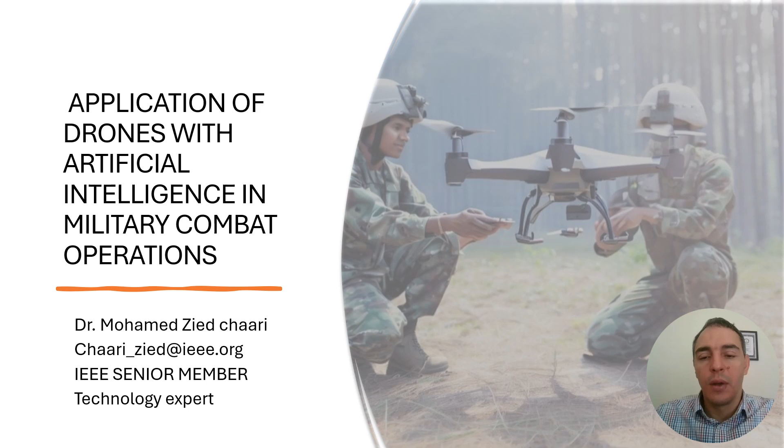We are working very hard in drones. So the outline of this presentation: we can start with the development status of the drone industry, the UAV classification, then we'll talk about the legitimacy of use of drones, and the legal use of drones. Fifth, we'll talk about what AI is and how it works in drones for both military and civilian applications. After that, we'll talk about the application of drones with artificial intelligence in military combat operations, and finally conclusions.

So we'll start with the development status of drones and history. According to this chart produced by Statista, in 2016 the revenue in billion dollars is around $0.6 billion, but in 2025 it will be around 12.6. In 2023 it's around 7.6. So we can see the huge increase in drone revenues from 2016 to 2025. And we can see the drones sold in thousands from 2016 is 110,000 to 116, until 2,679,000 drones worldwide, meaning huge utilization of drones worldwide.

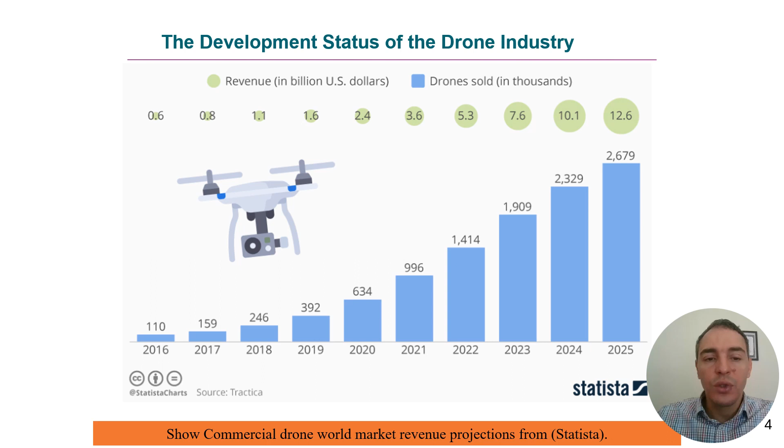We have another chart presenting the market size and forecast between 2018 and 2024, and we can see the CAGR increase is around 20.5%. From 2018, around 14 billion United States dollars, jumping to 43 billion USD in 2024.

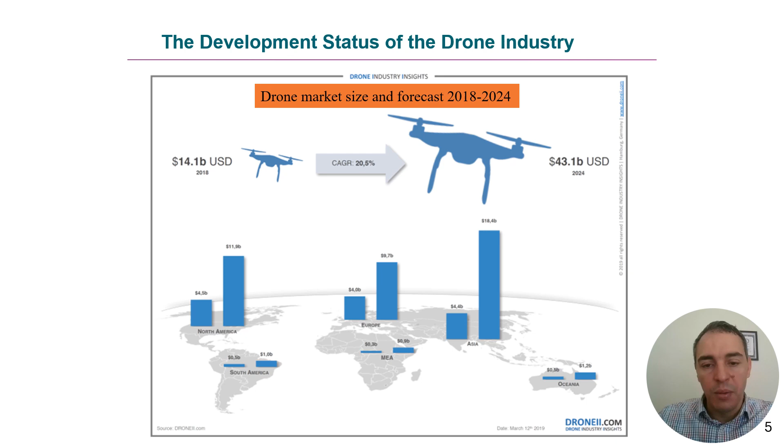The chart gives us more details according to area. You can see here North America, the value jumped from 4 billion to 11 billion dollars in 2024, and you can see the big market size in 2024 in Asia. In Asia we're talking about China, because it has a lot of companies like DJI, a huge worldwide manufacturer of drones. We can see Oceania or Australia has around 1.2 billion, and Africa is still 0.9. So this gives us more details.

Also for top dual-use drone manufacturers, we can see the United States has a big, high ranking worldwide. We can see here many companies making drones like 3D Robotics, SenseFly, DJI.

But now this question raises a big issue. CNBC asked people: can the United States compete with Chinese drones? Now many people, in many fighting areas, many combat areas, are now utilizing DJI and civilian drones. So how can we now change this mindset?

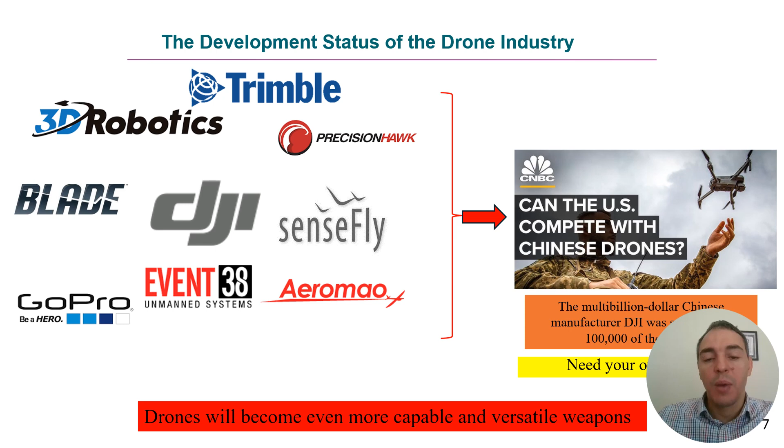Drones will become even more capable and versatile weapons. So drones are like weapons now - it's very dangerous, we need to take care about it. The use of drones in military warfare is likely to continue growing in the years to come, as drone technology increases very fast. Drones can be used in surveillance and reconnaissance, and can be utilized to attack enemy targets. Drones also have the capability to provide more effective surveillance, and now new types of military operations are made possible by drones. We can use drones for cyber attacks, for long range survey, and for many other operations.

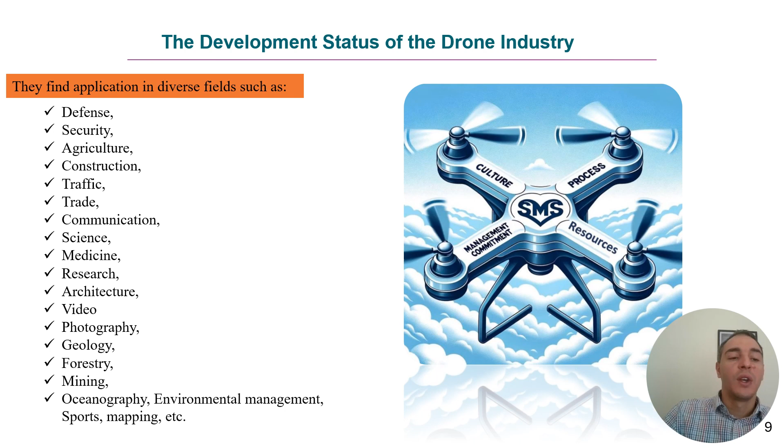But before talking about this issue, drones can be used in many fields: defense, security, agriculture, construction, traffic, communication, science, medicine, research and development, architecture, video, photography, geology, and a lot of applications.

After that, since there are a lot of drone sizes and a lot of drone technology, we should now talk about UAV classifications.

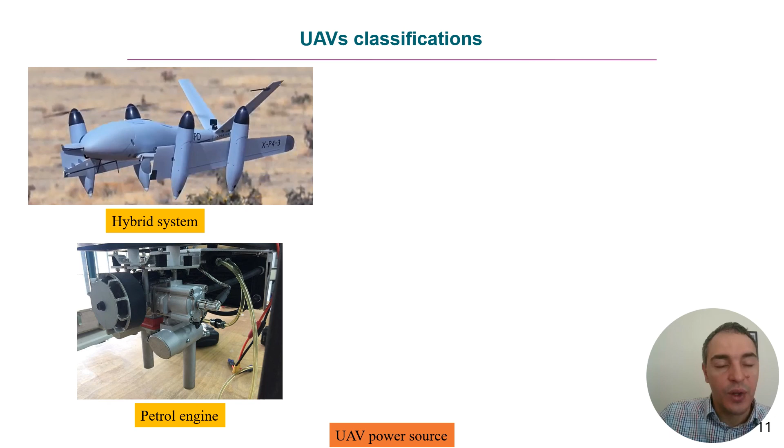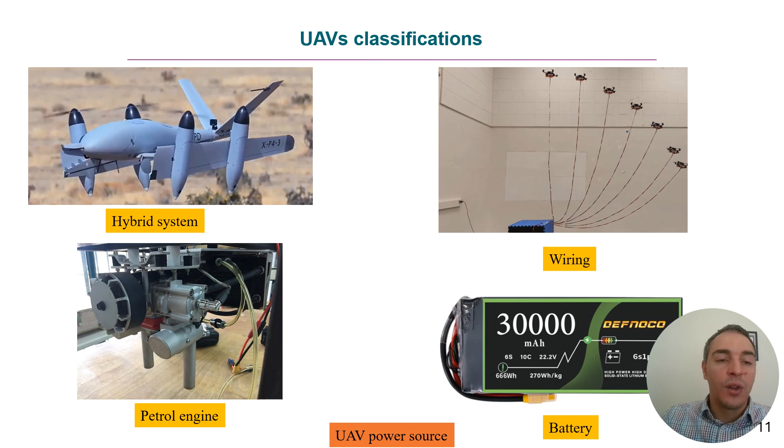In UAV classification, the most important parameter is the power source, the UAV power source. Now we have hybrid systems. You have petrol engine drones, battery drones, and wired drones. So we can use only wired drones, just wiring to make operations - no need for battery, no need for petrol engines. You can use a normal battery for operation like DJI, you have batteries, or we can use a petrol engine like Shahed, the Iranian drones, or any military drones. Also, we can use a hybrid system, meaning drones equipped with or utilizing both mechanical engines and batteries.

So there's a lot of civilian areas. We can use this drone for civilian areas, for example inspection, oil and gas, marine application, meteorology, agriculture, gas, and oil and gas inspection field.

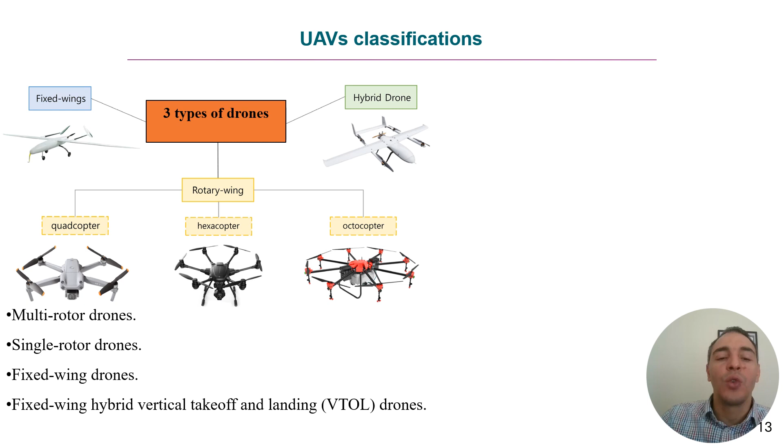So there are 3 types of drones: hybrid drones, fixed wing, and rotary wing drones. Rotary wing drones include quadcopter, hexacopter, and octocopters. So multi rotary drones, single rotary drones, fixed wing drones, fixed wing hybrid vertical takeoff and landing (VTOL) drones, and tank copters. We can see in this video, a drone can be like a tank, and also can fly. We can see this video now please.

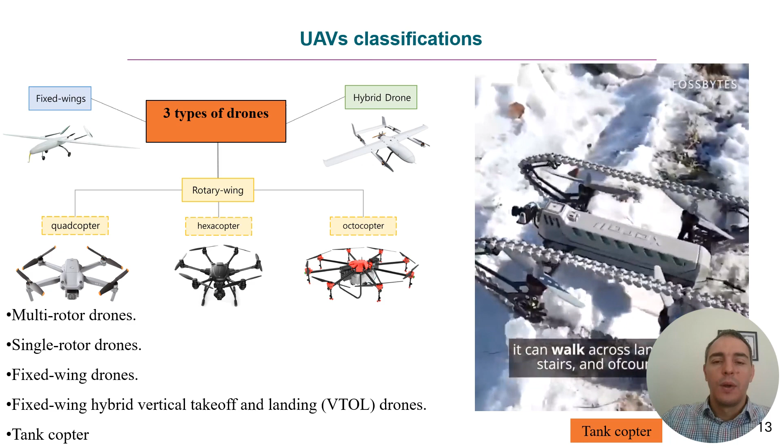Who said drones are meant just for the skies? Meet Xerall's X-Tank Copter, a drone that defies norms, conquering both air and land. With the agility of a tank and the grace of a copter, it can walk across land, snow, stairs, and of course fly. Weighing just 550 grams, this compact and nimble drone can be controlled easily via smartphone. Besides, it boasts a 720p HD camera, captures aerial shots and videos with a 120° wide-angle view.

Should all drones have such air and land travel features? Share your thoughts.

So we can see these drones can be utilized for land operation, and can be used like fly drones.

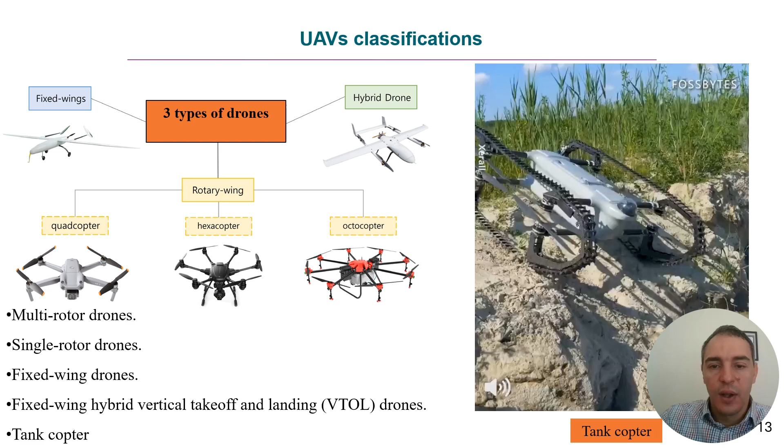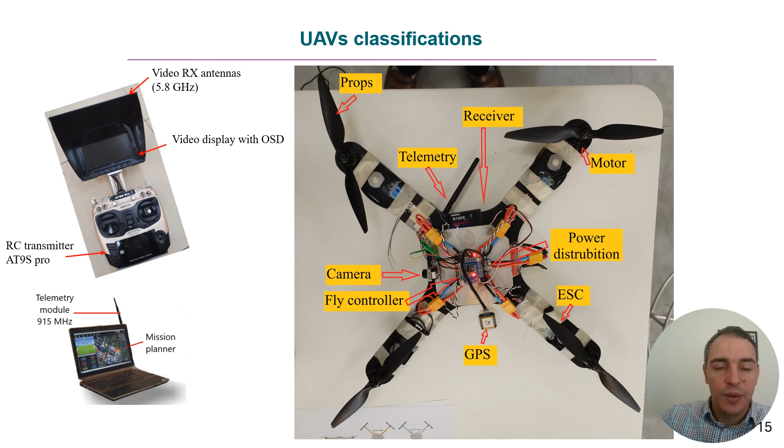The most important components of drones - there are also a lot of sensors. Any drone can utilize LiDAR, image sensor, magnetometer sensor, thermal sensor, multispectral sensors. For communication, we can use GPS, flight controller, radio telemetry, FPV goggles, and remote control. And for the main components of a drone, as we said in slide number 15: motor, battery, propellers, and ESC controllers.

This philosophy, the philosophy is here: how can people, or maybe people, utilize civilian application drones for illegal applications.

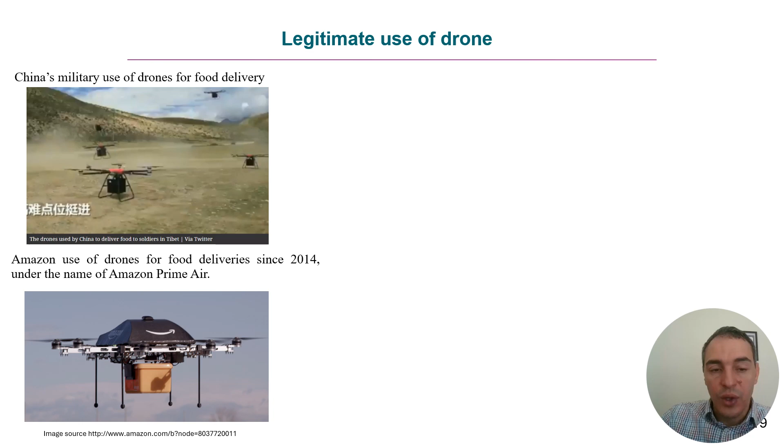So we go for legitimate use of drones. We can see Chinese military use the drone for food delivery, and Amazon trying to utilize drones for food delivery since 2014, so since 10 years ago.

Also, many UAVs now utilize for delivering first aid equipment in case of emergency, and this project is running by TU Delft University in Netherlands. Now the UN utilizes Drones for Good Corridor launched for food delivery or medicines, like the operation done in Sierra Leone.

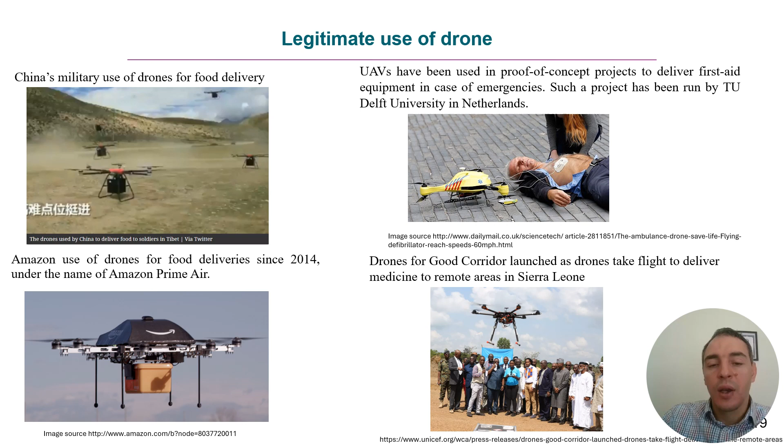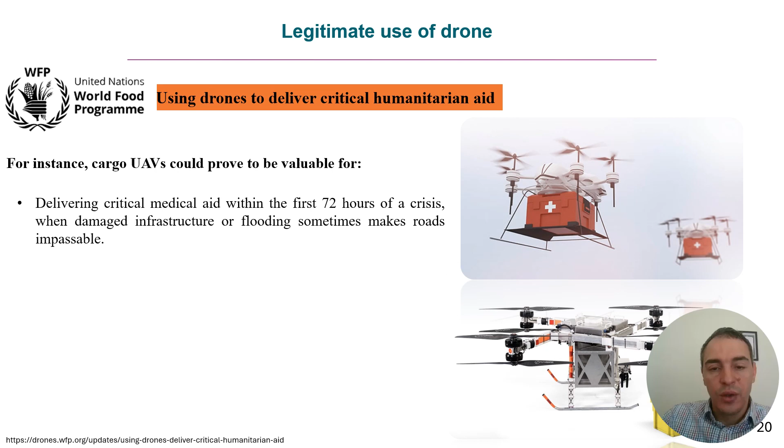Also the World Food Programme now is starting to utilize drones for food delivery in critical humanitarian aid. So delivery can be transferred from one place to another in short time, cheaper, and safer. No need for resources like a pilot, no need for landing strips and airports.

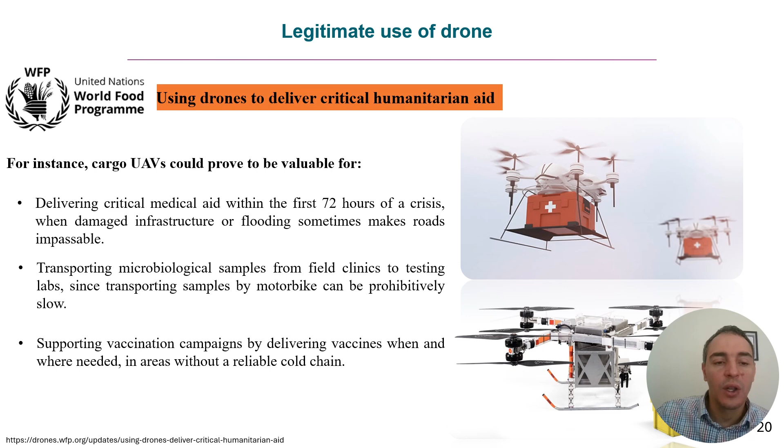So we just need a strong drone with the capability to carry 10 kg, 20 kg, for long distances of 10, 15, 5 kilometers, and this drone can be utilized in disaster applications. We can transport microbiological samples from field to testing labs, and also support vaccination transport from one area to another.

Also, drones can be utilized now for fireball dropping, and this was utilized in California in 2021. The firefighter teams use drones to drop fireballs, and also to survey the area and the progress of fire in the farm and in dangerous areas.

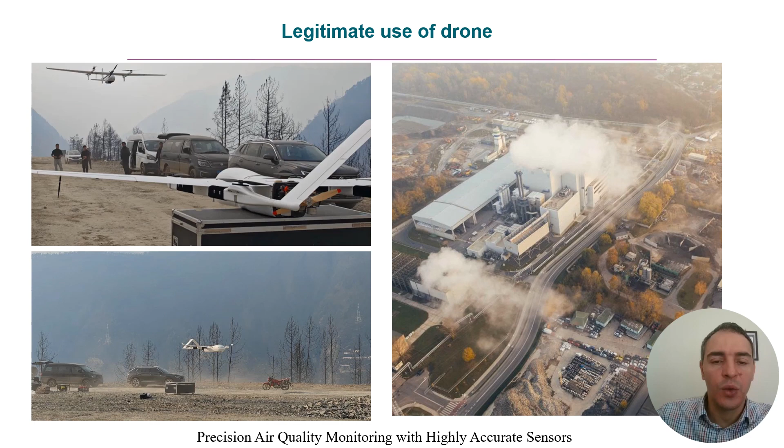Also, drones can be utilized to make measurement and quality monitoring of air and pollution. Drones can be equipped with a lot of sensors to give us more details about air quality.

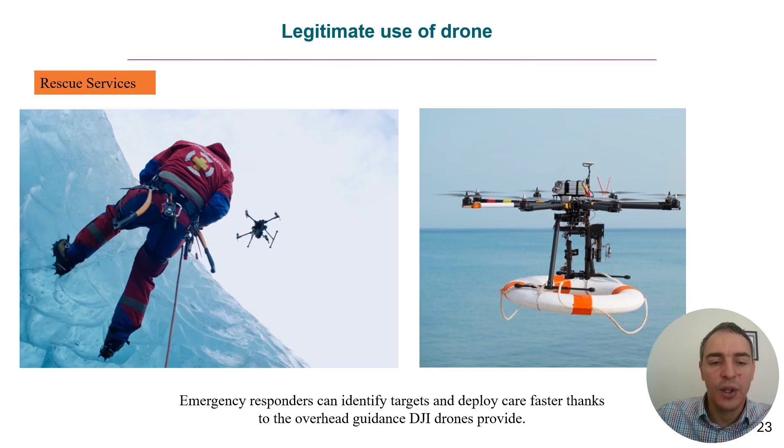Also, drones can be utilized for rescue services, and emergency response can identify targets faster than any other technology.

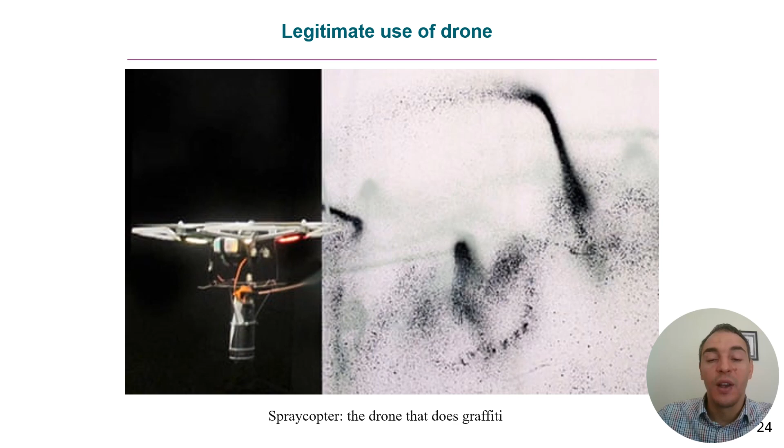Also, drones now can be used like spray copters, so you can utilize them if you need to write something or do graffiti in emergency times. So you can use spray copters.

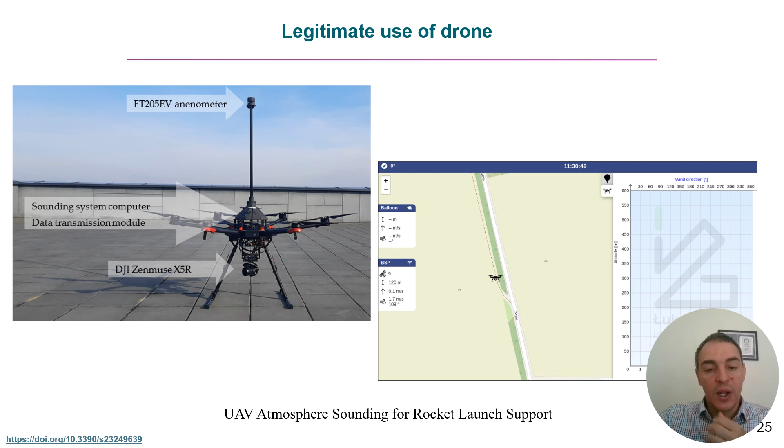Also now drones can be utilized like UAV atmosphere sounding for rocket launch support. So it can help for rocket launch support.

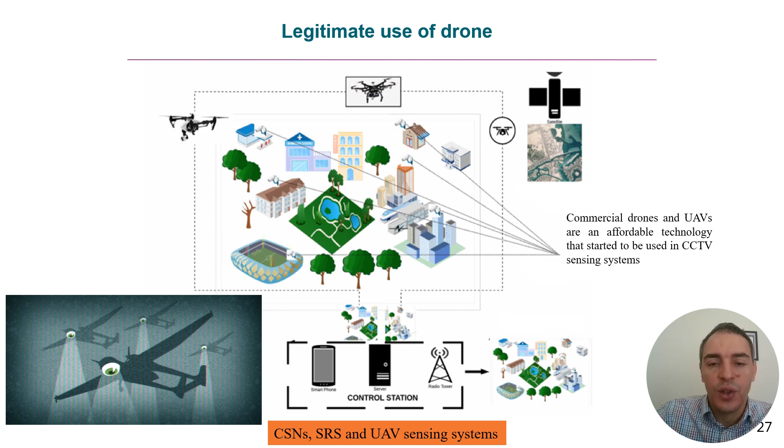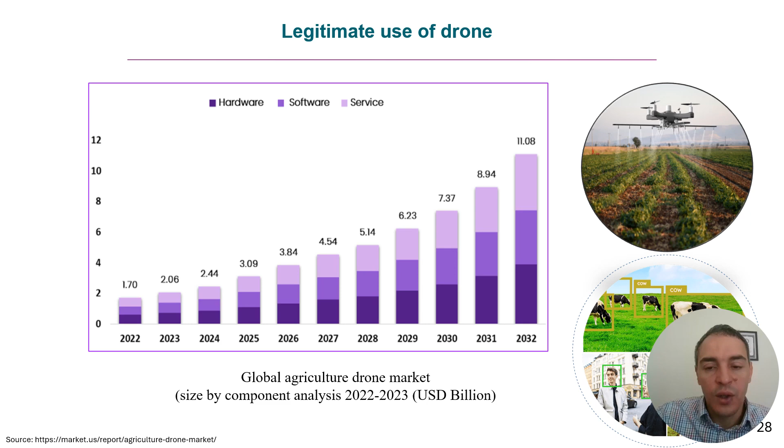So in agriculture, UAVs can be utilized for harvesting, for spraying, for mapping, and for sensing.

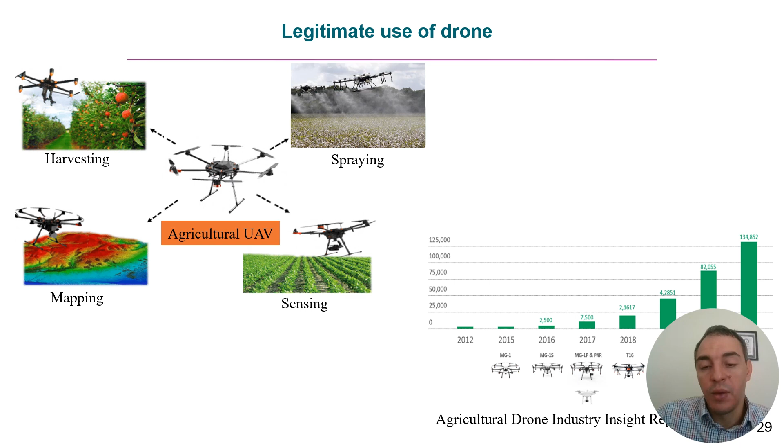DJI produced this chart according to the DJI departments, and from 2012 to 2024, the levels of drone production increased very high. This shows people now use drones for agriculture.

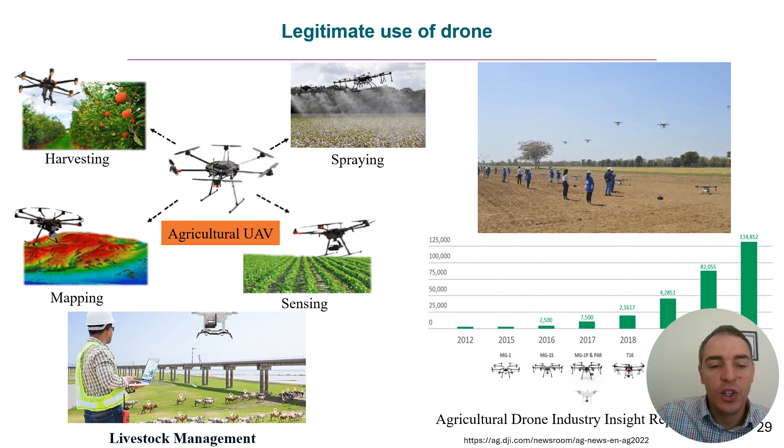Also, we can utilize drones like livestock management. We can check our animals inside the farm, and make calculations for crowding area over lifetimes.

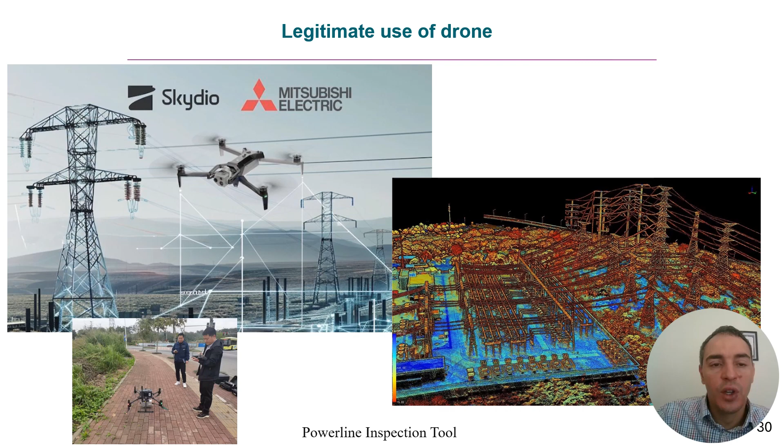Also, drones can be utilized for power line inspection, like the Skydio and Mitsubishi contract, to check all the power stations and high power transmission line inspection with Skydio drones.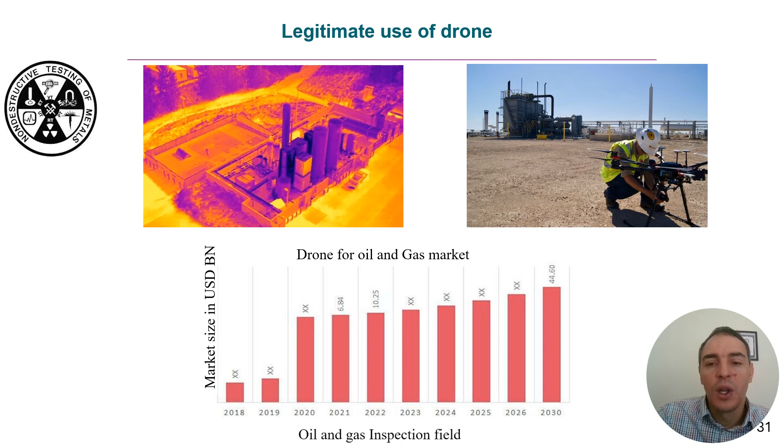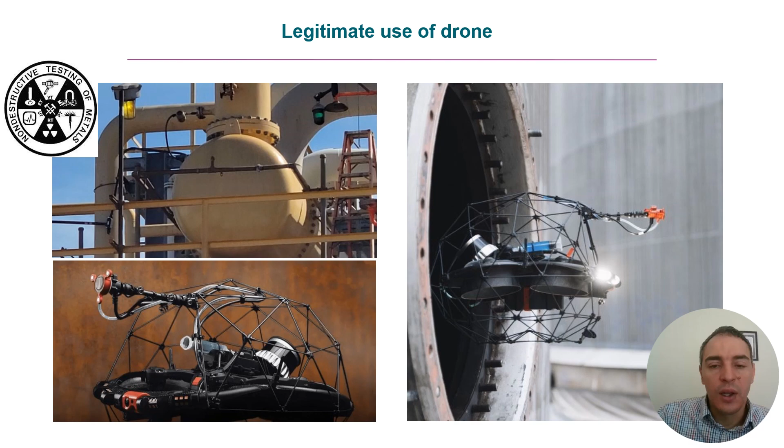Of oil and gas fields. Also it can be utilized in NDT, non-destructive testing, for wall thickness, and drones can go inside vessel tanks and make measurements or visual inspections.

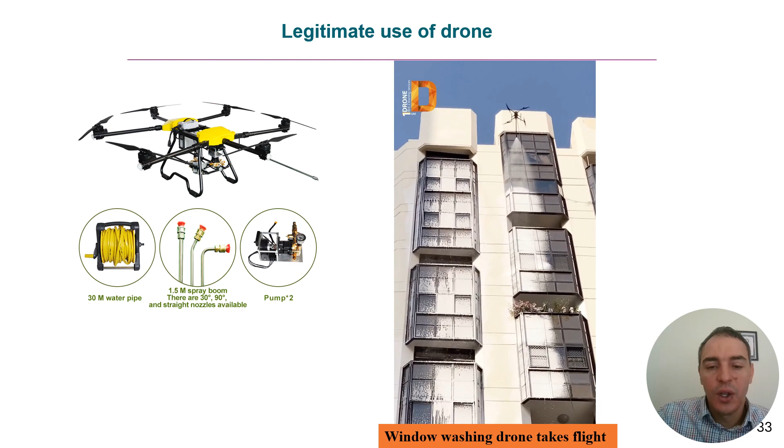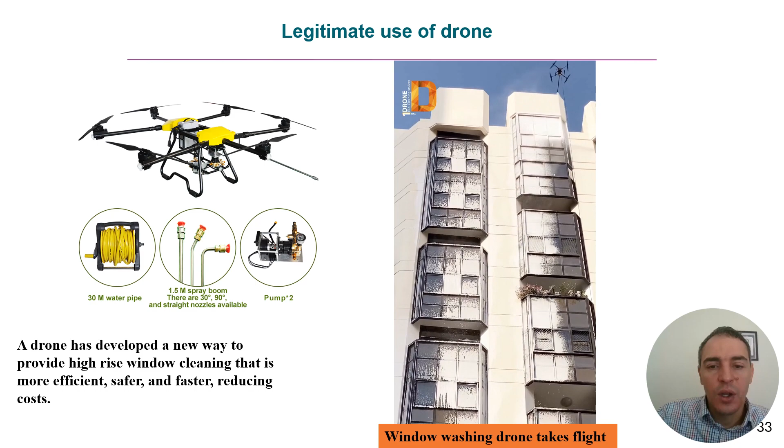Also, drones now can be utilized for washing windows tasks. This drone is equipped with a hose and a water pump, and has the capability to clean windows of one building in a short time.

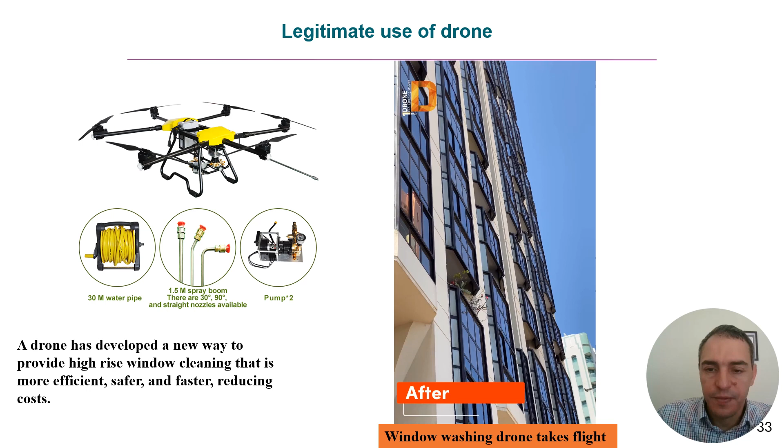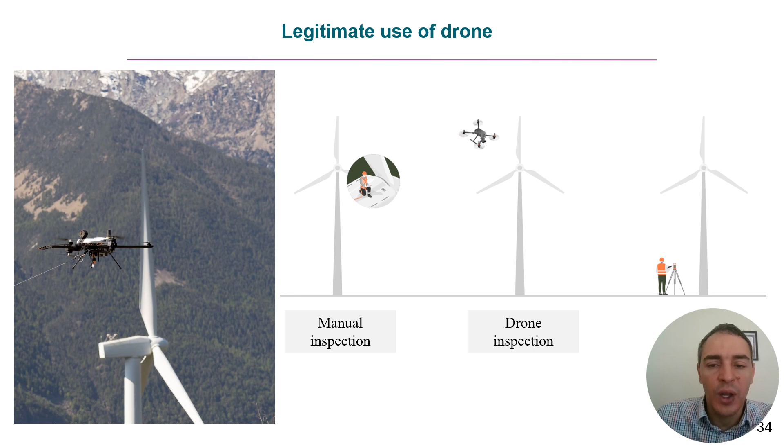Also, drones can be utilized for inspection. We can see the manual inspection, the traditional manual inspection, or we can utilize the drone inspection to check the propellers of any wind energy stations.

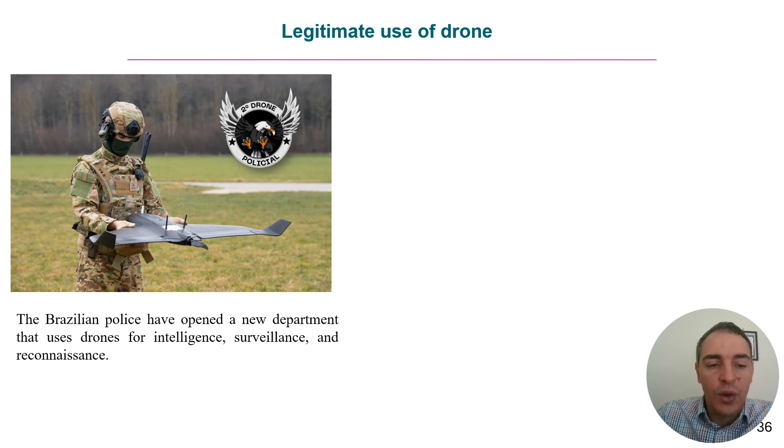Also, the Brazilian police utilize drones and made a new department for drone intelligence, surveillance, and reconnaissance. Now also in Santa Clara, police departments started to make new departments and purchase drones for aerial view for local surveillance and for intelligence applications.

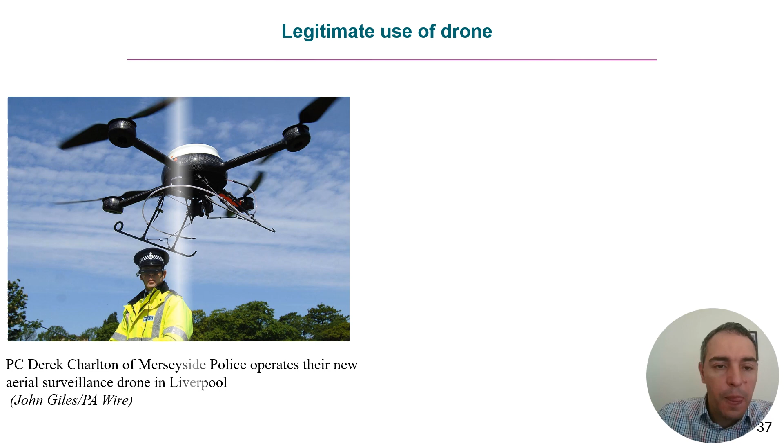Also in Liverpool, the police start using drones, and also in Swedish state police utilize drones for security of citizens.

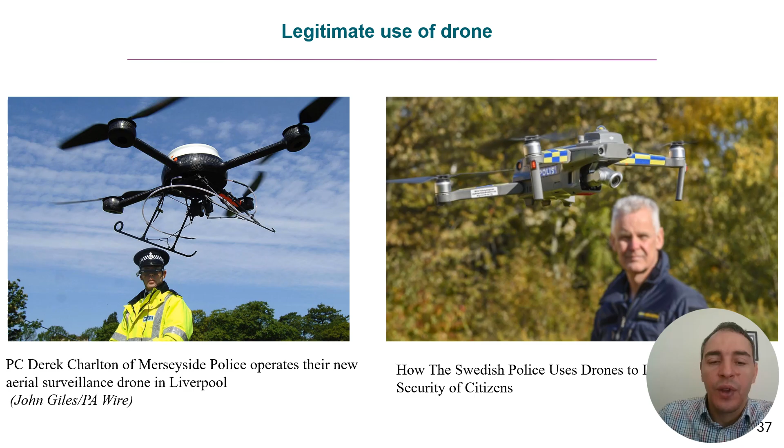Now we go for illegal use of drones. So we were talking about the legal use of drones, and now we can talk about illegal use of drones. This is a big issue, this is a big dangerous area - illegal use of drones and suspect and hostile drones.

And this is very dangerous technology, and all state governments should take care about this field. So this is what we are very clear to understand.

So drones can make a lot of changes and a lot of problems for economy issues, also for political issues, and drones can be utilized for war. So we're starting with economic issues.

Also drones can make political issues. A drone crashed in front of Angela Merkel, the PM of Germany. Also in 2015, a drone containing radiation landed on the roof of Japan's Prime Minister Mr. Shinzo Abe. Also, a drone tried to attack the president of Venezuela, Mr. Nicolas Maduro, in August 2018.

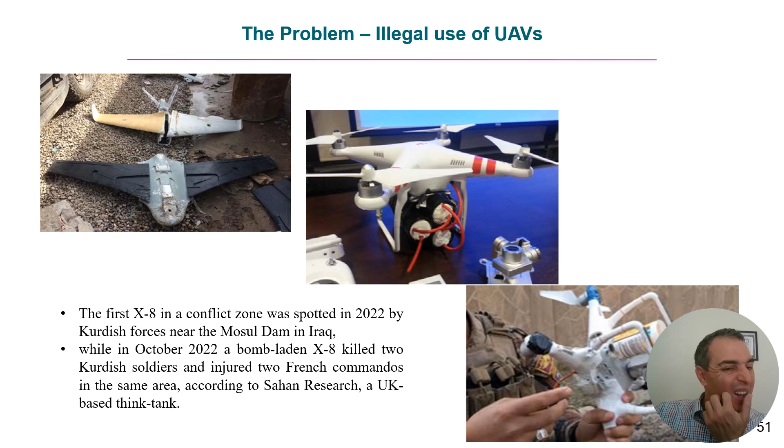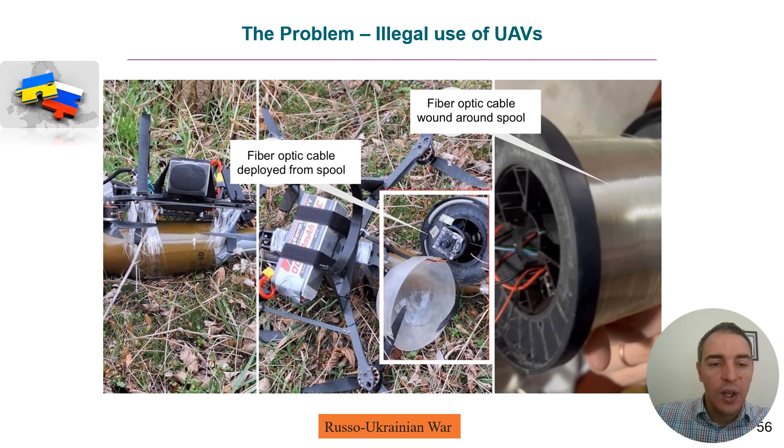So you can see for fighting between Russia and Ukraine, people are using camera, battery with rocket to attack. Also how Russia uses AI technology through Shahed. Russia and Ukraine also utilize commercial drone DJI to fight and kill fighters.

In this presentation, we will concentrate on two parts of these seven patterns: autonomous systems and recognition systems. This is most important. So we are talking now about the application of drones with artificial intelligence in military combat operations.

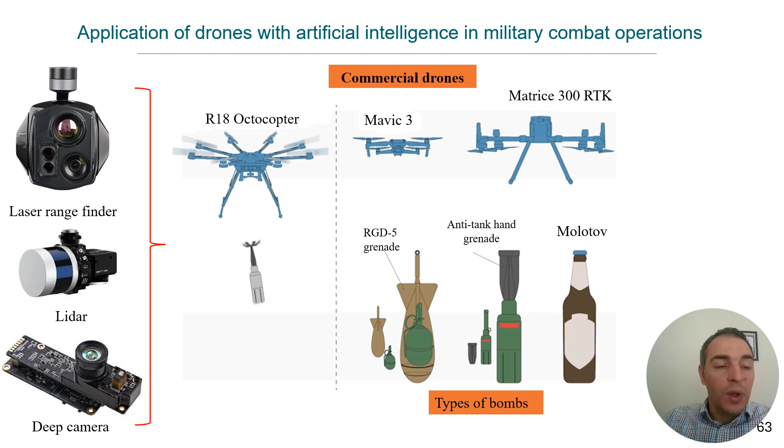All these drones are utilized in the Russian-Ukrainian war. There are different dangerous payloads, and they are equipped with laser rangefinder, Lidar, or depth camera.

And you can see now this video.

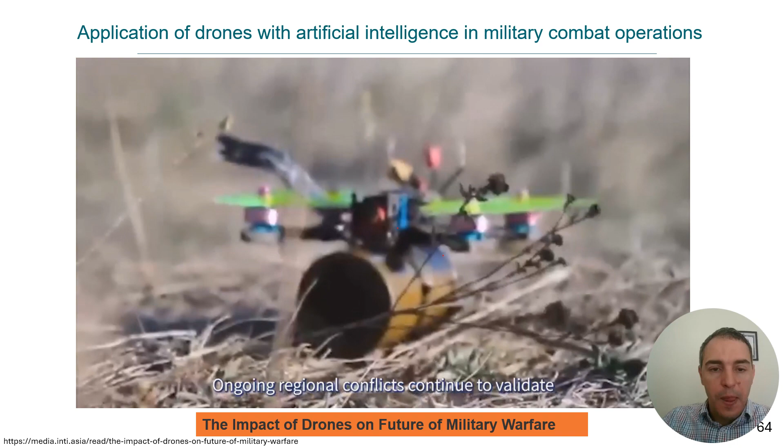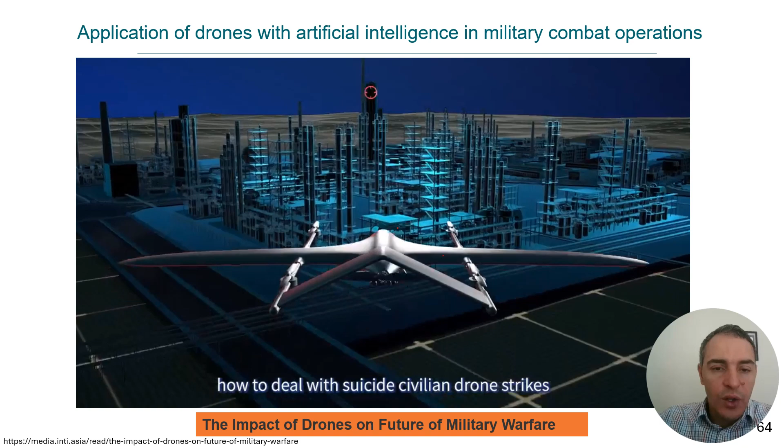Ongoing regional conflicts continue to validate the importance of civilian drones in the military sphere, while highlighting the lack of effectiveness of existing drone countermeasures against vertical takeoff and landing drones, traversing drones, and other equipment. In hot zones, how to deal with suicide civilian drone strikes is gradually becoming an issue that needs to be taken seriously by those concerned.

At present, the drone countermeasures commonly adopted globally mainly include two categories. One is to incapacitate the drone, using electronic equipment to interfere with its navigation or control signals. The other is to physically destroy the drone, using traditional firearms or laser weapons to shoot it down directly. The operation of these two methods in non-conflict areas has multiple drawbacks, such as severe impacts on socio-economic activities, high levels of collateral damage, and a high risk of triggering public panic.

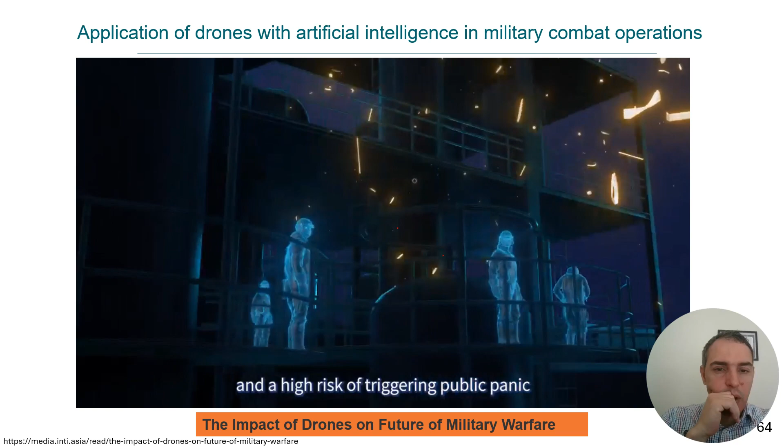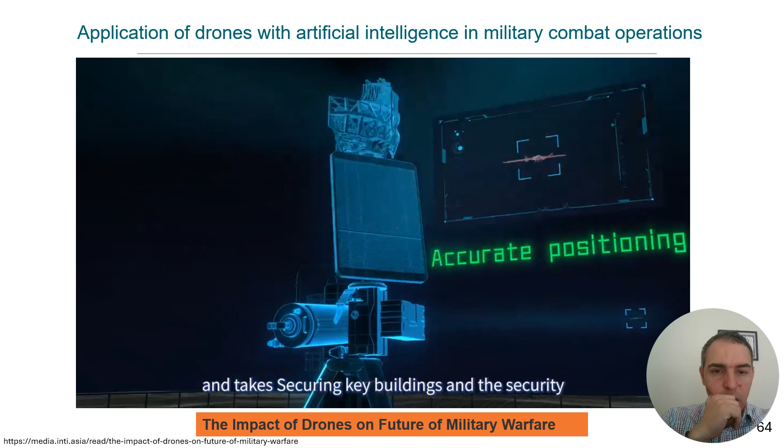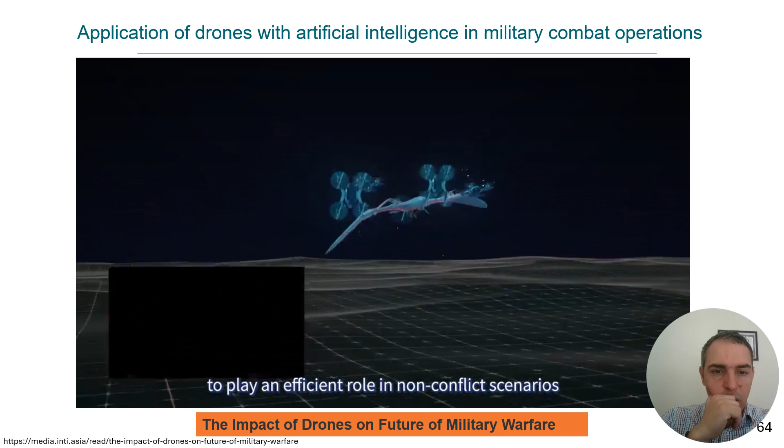The Dragon Shadow Close Air Defense System is independently researched and developed by our company and takes securing key buildings and the security of main events as its obligation, effectively solving a problem that traditional drone countermeasures are hard to efficiently address in non-conflict scenarios. Our core ideology is simplicity, efficiency, and directness.

The Dragon Shadow UAV Close Air Defense System consists of three components: the detection module, used for long-range detection and real-time target locking; the AI algorithm module, responsible for automatically identifying the enemy and directing the drone cluster to carry out the attack; and the drone cluster, which, depending on the type of incoming drone, dispatches the appropriate drones to carry out the attack.

The system is characterized by an adjustable detection range and an optional number and type of munitions drones, to ensure that threats are detected and dealt with in a timely manner.

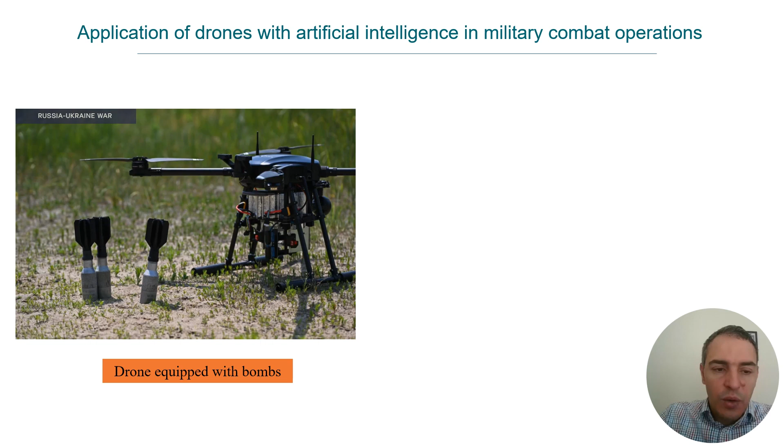So we can see this is one of the systems for detection, classification, and attack based on AI algorithm. The drones can be equipped with bombs or equipped with a gun machine.

According to the United States Army, the proposal of C5ISR technology: the 5C means command, control, computer, communication, and cyber; the I is intelligence, S is surveillance, and R is reconnaissance. These are the most important parameters.

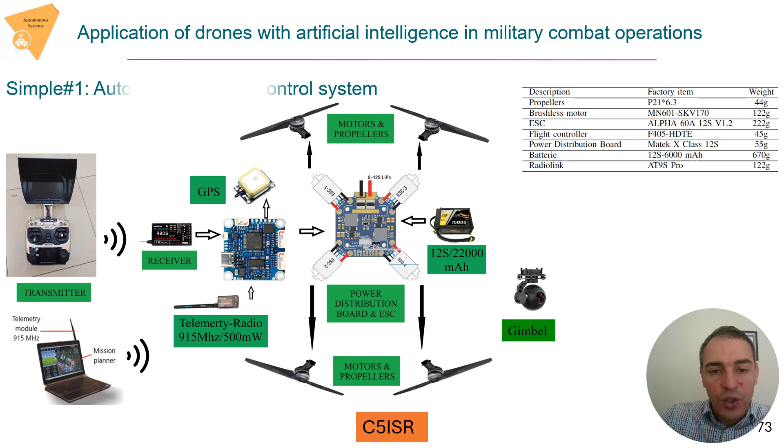So we can see these sample drones can do a lot with this technology - this is the basic function of drones. You can make a mission planning from one place to another place, but in this area we need GPS. If anybody uses GPS jamming systems, you lose signal, and the drone will automatically return back to home.

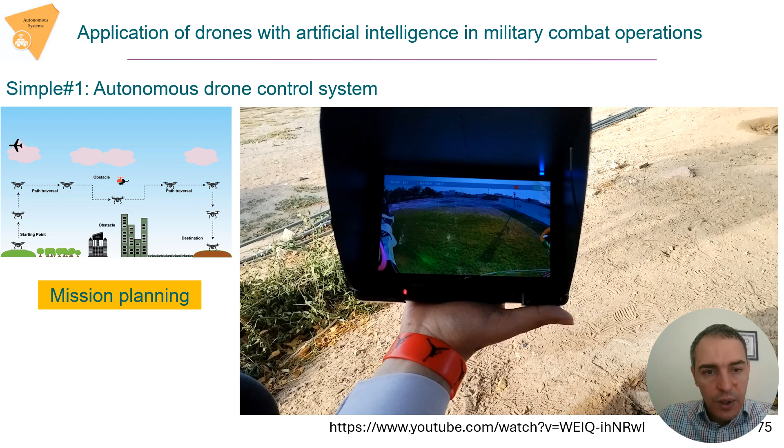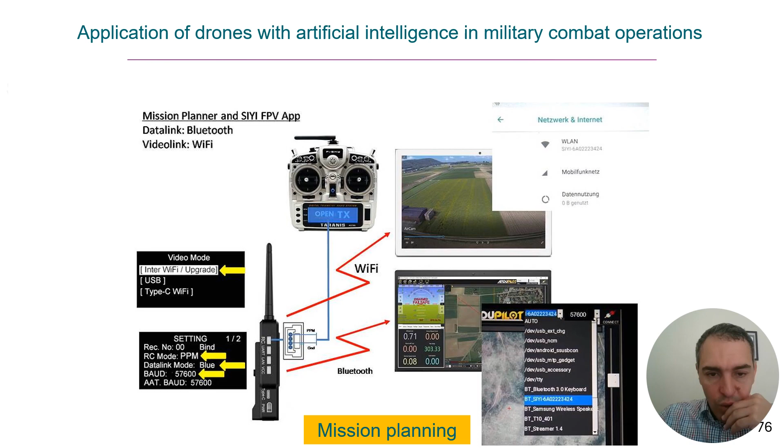So also here is mission planner - how you can arrange and control it through open source autopilot systems. So we can see now the trajectory of the drone from one area to another area. So we can make planning for altitude, takeoff, and landing.

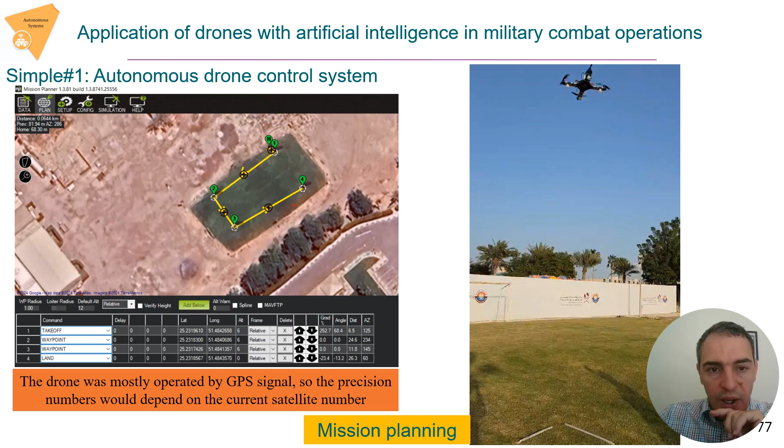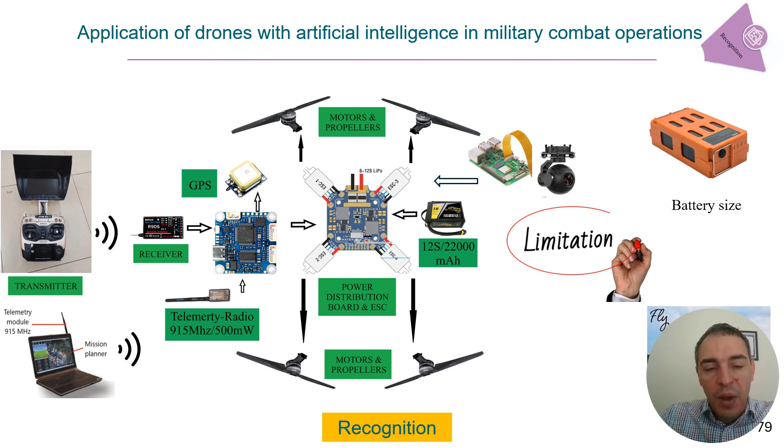So for recognitions, we need computer vision, machine learning, deep learning, and all this data can be added in one platform, added to any drone. We just need a computer with a camera to learn and train our drone for many camera-based applications. But these have limitations - battery size and flight timing - because the computer consumes a lot of power and current, and this makes a difference for the battery.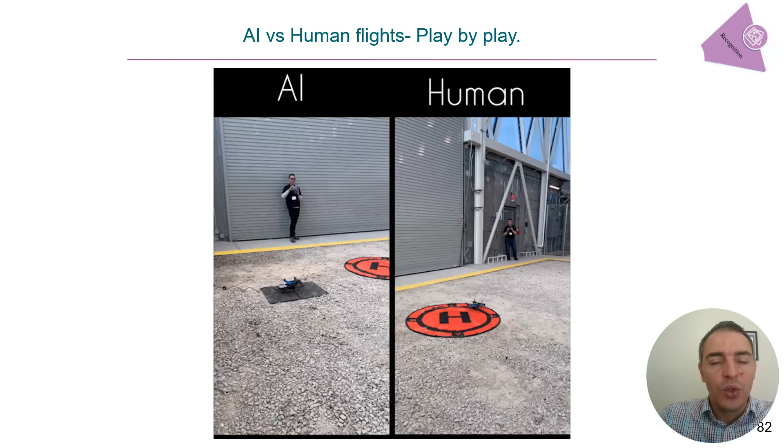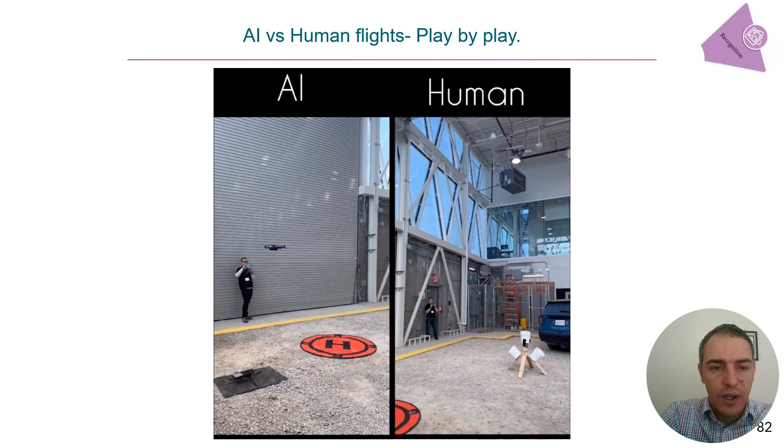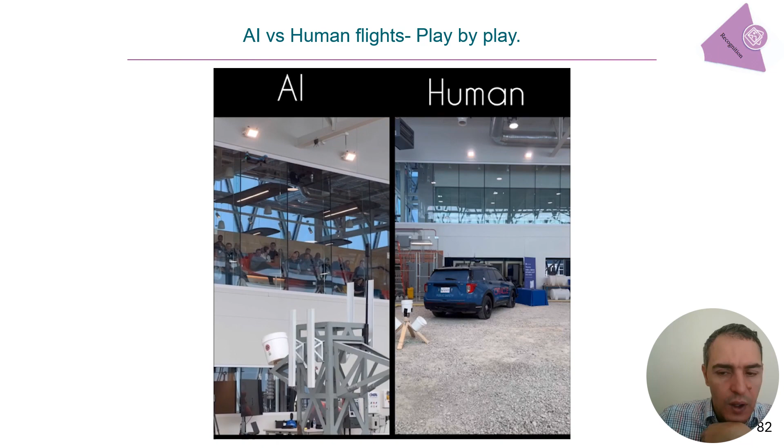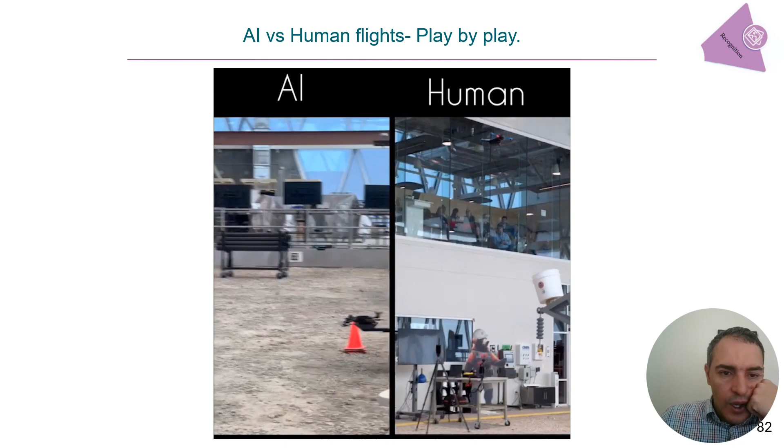You can see now the comparison between controlling a drone with AI technology versus with a human. So you can see AI here, and you can see now the human interface. You can see the control of drones with AI, the trajectory from one place to another place, and with human control, the human interface.

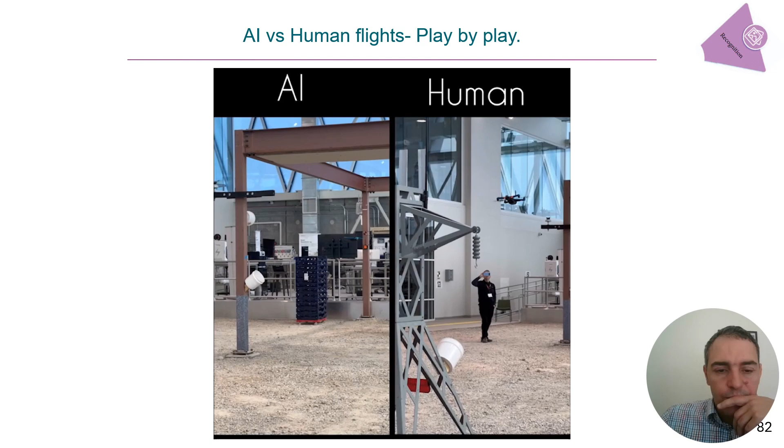If we make a comparison between AI versus human fly, play by play: from 0 to 7 seconds, the autonomous drone takes off, but the autonomy engine AI checks the surrounding for obstacles.

This difference between 0 to 7 seconds is because the autonomous drone takes time to check around if there are any obstacles or potential damage before making decisions. But the human pilot already has a line of sight, so the pilot does not need to check for obstacles.

So that's about 7 seconds difference between the AI and the human pilot. From 7 to 15 seconds, this continues for the human-controlled drone, which arrives at the first packet a few seconds before the autonomous drone.

The human pilot arrived first since it didn't have to check its surroundings, checked the QR code, and moved on.

From 15 to 19 seconds the autonomous drone moves from the first packet to the second packet, while the human pilot moves to the second packet and adjusts the camera. From 19 to 24 seconds, the autonomous drone was a few seconds ahead of the human pilot and adjusted its camera as it moved to the third packet.

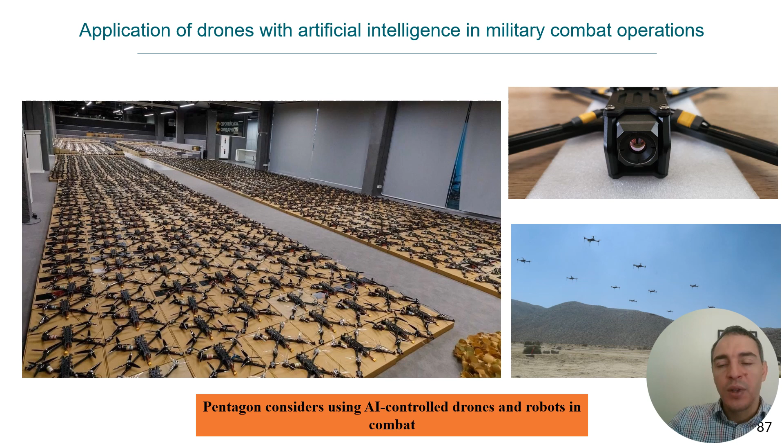For military applications we need a lot, minimum 6,000 images for military vehicles with different sizes, different angles, and different climates.

Also for military tanks, military trucks, and stationary military equipment, we need more than 2,000 images and 20 videos.

But I can't say this is wrong, we have a lot of limitations, because at an altitude of 100 feet or 500 feet, the resolution and the weather can cause a lot of issues, so I can't give details about the classification accuracy.

The classification efficiency will be very low. In the lab, we can make things work similarly and we are happy, but in the battlefield, in real testing and real application, we cannot say this algorithm or technology is totally right.

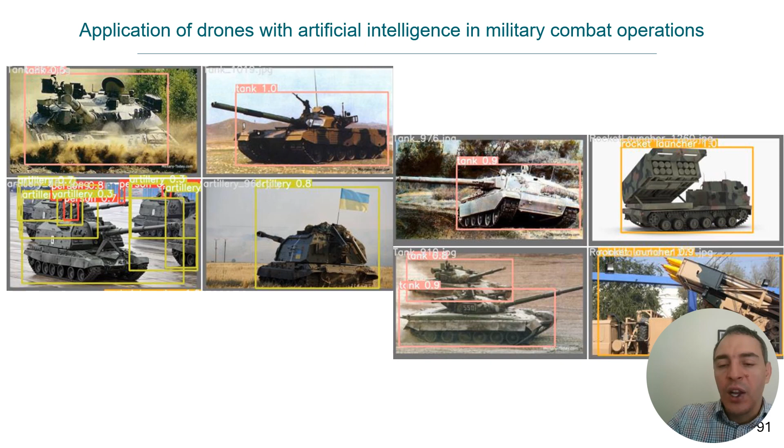For example, the system may classify a tank as 100%, or only 0.5 confidence as a tank, not tanks plural. There are a lot of parameters involved. We can use YOLOv8 or YOLOv9, but at the end of the day we still have a lot of limitations.

So for image processing and AI with drones, there are many limitations, starting with fog. Fog, rain, and sandstorms present limitations, as you can see with this Black Hornet Nano helicopter drone, the smallest and most expensive worldwide.

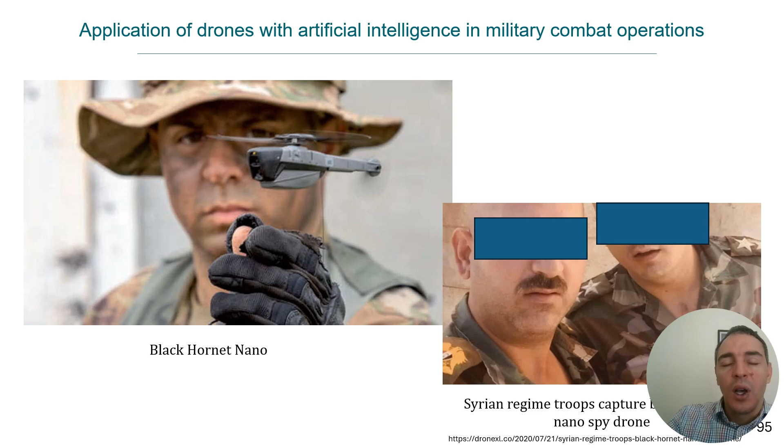It has already been attacked and captured by people in the Syrian regime, among other mentions. So nothing is completely safe, and human interaction should be involved in any operation.

Now we go to the conclusion. The military is one of the most significant sectors utilizing AI technology.

AI military drones need high computer vision, and high computer vision means high platform and high computing power, which creates limitations on our flight times.

In the future, drones can be utilized to neutralize enemies, control border airspace, and be used for killing and tracking enemies in war and critical times.